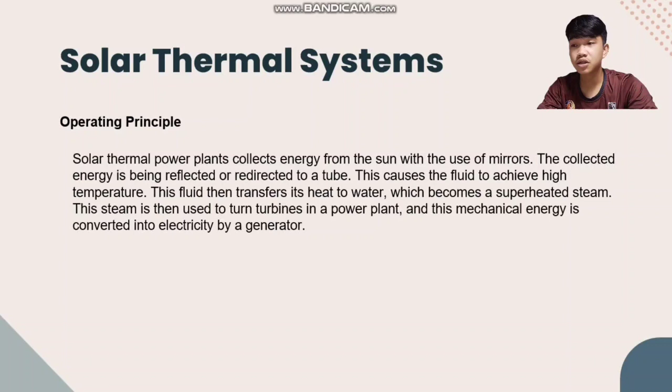So, there are 4 types of solar thermal systems: parabolic trough, solar tower, linear Fresnel reflector, and parabolic dish. So, lahat naman nito, nag-ooperate sila under the same principle. Nagkakaiba lang sila with the manner of collecting sunlight. And to further understand these 4 types, let's proceed to parabolic trough.

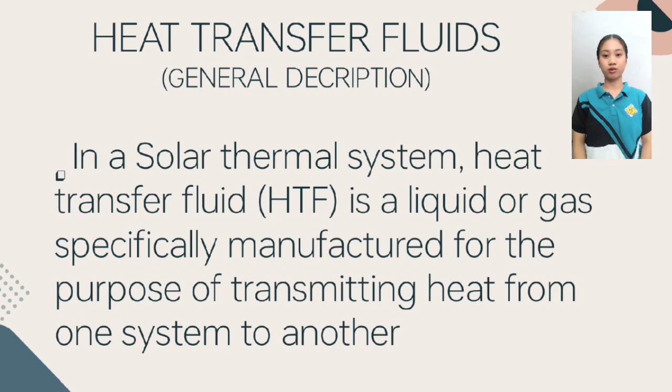Parabolic trough. Heat transfer fluids in general description. In a solar thermal system, heat transfer fluid or HTF is a liquid or gas specifically manufactured for the purpose of transmitting heat from one system to another. So, inside this tube is a heat transfer fluid or HTF.

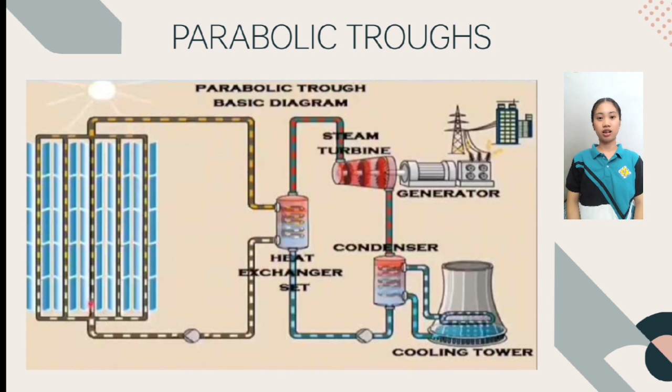Alam naman natin that the boiling point of water is 100 degrees Celsius. And under this parabolic trough, the heat transfer fluid can reach up to 400 degrees Celsius. 100 degrees Celsius lang ang boiling point ng water. Konting temperature na lang, mag-evaporate na siya. And it will turn to a pressurized and superheated steam. So, ganun yung mangyayari dito sa system natin.

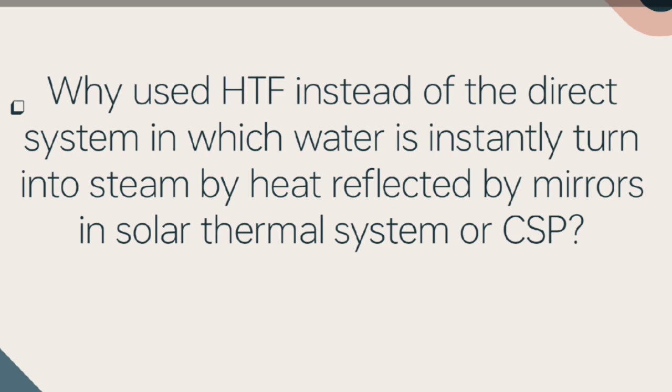Now, question. Why use HTF instead of the direct system in which water is instantly turned into steam by heat reflected by mirrors in solar thermal system or CSP, concentrating solar power? Kung tatanungin ko kayo, pwede bang gamitin yung tubig as a heat transfer fluid, or pwede ba na direct system na lang yung gamitin natin, where water is being turned into steam directly? The answer is yes. Pwede.

Kung pwede naman pala yung ganun, bakit gumagamit pa ng HTF o heat transfer fluid? Here is the main answer. These working fluids have high heat capacity. It can maintain a high level of hotness for a long period of time. So, kaya niyang mag-maintain ng hotness for long period of time. That is why, in concentrating solar power or CSP, a large volume of HTF is heated to an elevated temperature during daytime when sunlight intensity is at its peak.

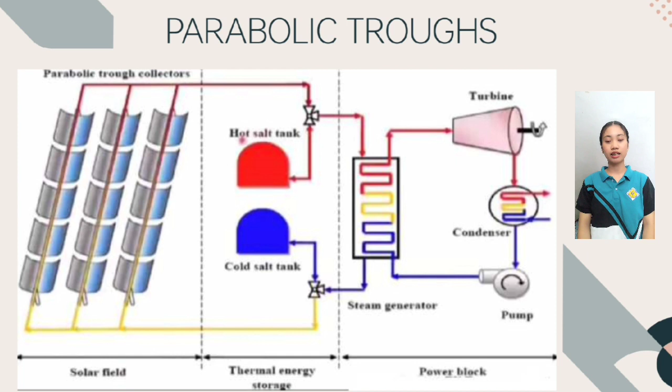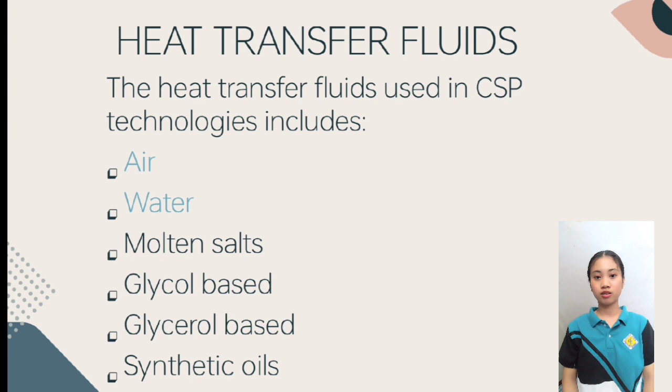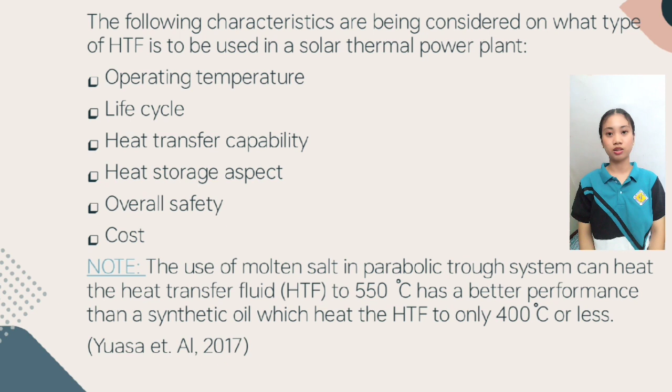A solar tower, also known as a solar power tower or a solar thermal power tower, is a type of solar power plant that uses concentrated solar power or CSP technology to generate electricity. It consists of a field of large mirrors called heliostats, which track the movement of the sun and reflect sunlight onto the receiver mounted at the top of a tall tower.

Now, here's how a solar tower typically works. First is the heliostat field. The solar tower features a field of thousands of heliostats, which are large flat mirrors that track the sun's movement across the sky. These heliostats are arranged in a circular or semicircular pattern around the tower.

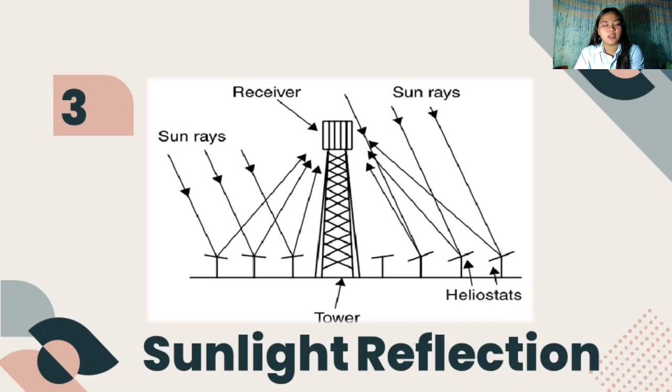Next is the sunlight reflection. The heliostats reflect and concentrate sunlight onto the receiver mounted at the top of the tall tower. By precisely angling the mirrors, the concentrated sunlight can achieve high temperatures at the receiver.

Now then, the receiver, usually located at the top of the tower, is exposed to concentrated sunlight. It contains heat-absorbing materials such as a heat transfer fluid like molten salt or gas, which absorbs the concentrated solar energy and heats up significantly. Now, to the heat transfer. The heat absorbed by the receiver is transferred to a heat transfer fluid circulating within the receiver.

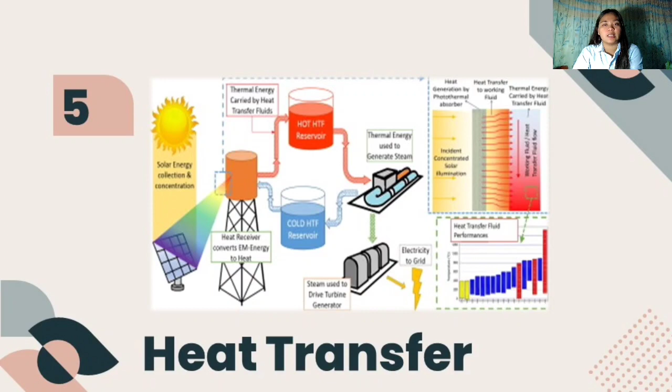This fluid is then used to generate steam, which drives a turbine connected to a generator to produce electricity. Alternatively, in some designs, the receiver may heat up a gas directly, which is then used to generate electricity. Now, the electricity generation. The steam or the heated gas produced by the receiver is used to drive the turbine, which in turn drives a generator to produce electricity. The electricity generated is then sent to the grid for distribution to customers.

Now, solar towers offer several advantages over other forms of solar power generation, including the ability to generate electricity even when the sun is not shining by using thermal energy storage systems. Additionally, they have the potential to achieve higher temperatures and therefore higher efficiencies compared to other CSP technologies like parabolic trough systems or dish Stirling systems. However, they require a significant land area and investment due to the large number of heliostats and a tall tower infrastructure.

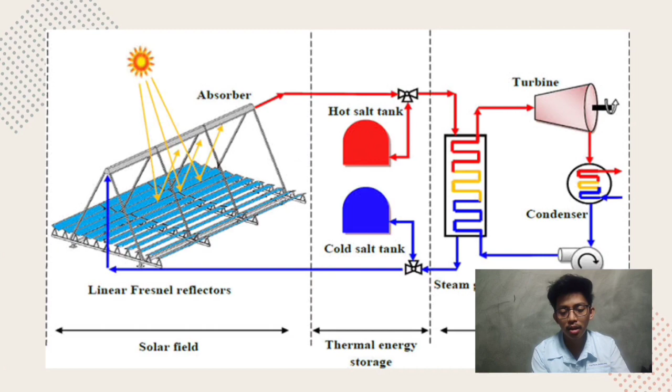Parabolic dish. This consists of sets of flat mirrors combined to form a large parabolic dish that is attached to a motor sensor which tracks the movement of the sun in dual axis. The collected energy from the sun is concentrated to the PCU located at the focal point of the dish. The PCU consists mainly of a thermal receiver and a Stirling engine. The thermal receiver, which is a heat exchanger, transfers its heat to the Stirling engine, causing it to reciprocate. This reciprocating movement causes the rotation of an electric generator.

These dishes can concentrate sunlight much better than parabolic troughs, and the fluid run through them can reach temperatures upward of 750 degrees Celsius. Because of the limitations of size and the small quantity of fluid, parabolic dish collectors are suitable for small-scale power generation.

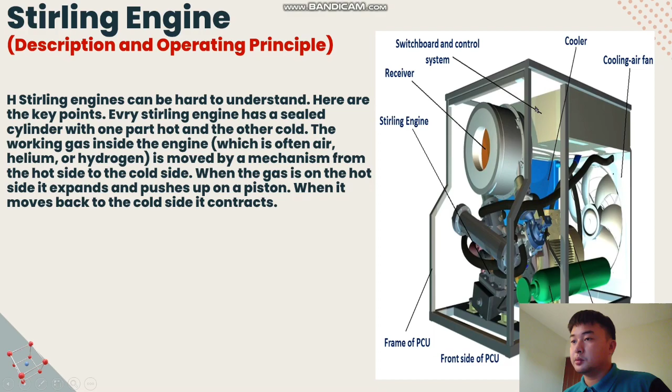So let's continue our discussion sa solar thermal power plant. The world's largest solar thermal power station.